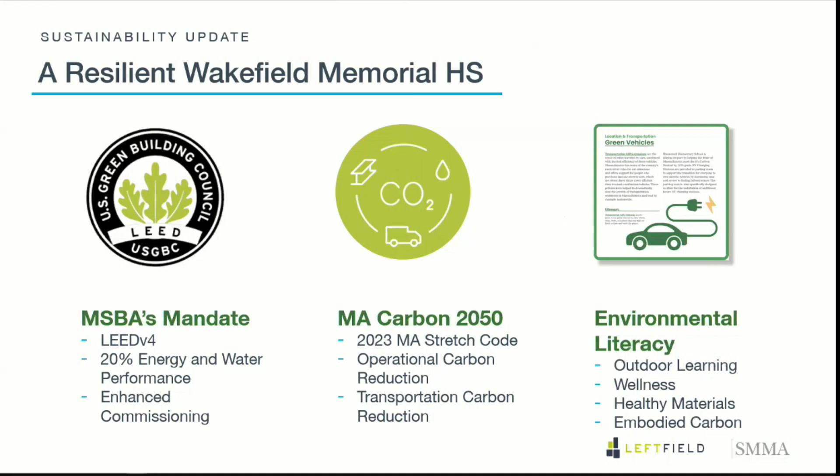And this is one of the most important items, criteria, and features that we want to make sure we don't forget about and fully integrate into the project design: environmental literacy, using the building and its features to support and complement an educational curriculum that embraces environmental leadership.

So to give you a bit of an overview, we have a new energy stretch code coming, as I mentioned, next year. It will be mandated next year as part of the state's commitment and requirement per the law to update their energy code every 3 years. The new code will be based upon IECC 2021, which has basically integrated a lot of our current Massachusetts stretch code as part of this new version of IECC.

The state is building upon that IECC 2021 with the new stretch code, which is currently under review. The language is under review and planned to be issued January 2023. The one different thing this time with the update to the code is that there will be an opt-in net zero energy code option for green communities. Cities and towns may automatically fold in the stretch code, called the standard stretch code, or they may opt into a net zero energy stretch code.

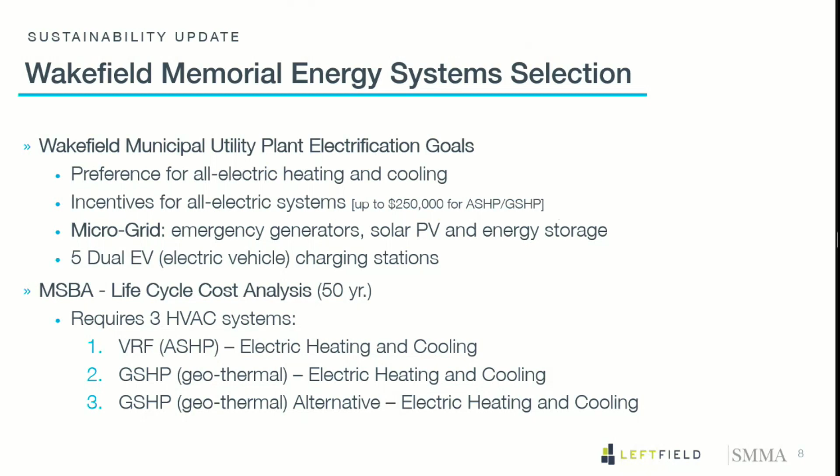The major differentiator between the three systems in the life cycle cost analysis is the fact that they require a comparison of three different HVAC systems. On the board here, you can see we have an air source heat pump system, a ground source heat pump system, and there are two variations of the ground source heat pump system as part of the analysis we're about to complete in the next few weeks to submit to MSBA.

The project, as mentioned, is going to be LEED certified. As part of the design of the project, we want everyone to understand that it's not just energy—it's a comprehensive application of the whole spectrum of sustainable design criteria. The project will include water efficiency and sustainable site features.

We're paying attention to indoor environmental quality, and of course sustainable materials, as well as making the building ready with systems and signage that will support and inform occupant behavior once the building is occupied.

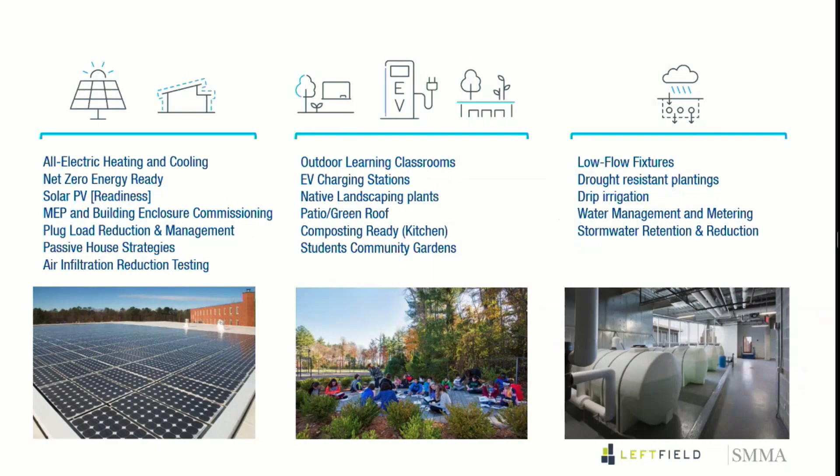During your Q&A, if you have any questions about these, the idea is to give you sort of the breadth of what these involve, but we can certainly come back to these slides.

In terms of materials, we have all the basics of sustainable materials: recycled content, certified wood, environmental product declaration, which looks at the global impact of products in terms of pollution, and the health product declaration. We're also looking at materials that are warm, biophilia, thermal comfort, abundant daylight. All of these are part of indoor environmental quality, low emitting material, and fenestration in the right place so you bring enough daylight without losing too much on energy performance. And of course, user behavior and plug load management, and green education curriculum in terms of post-occupancy.

In terms of passive house strategies and net zero energy strategies, the first focus is on the enclosure—we need to make sure it's highly insulated and airtight. That airtightness is complemented by whole building air infiltration testing, which is part of the project. I'd like to note that testing is actually going to be required in the new code. Then all the high performance systems, in combination with the enclosure, are part of achieving net zero ready.

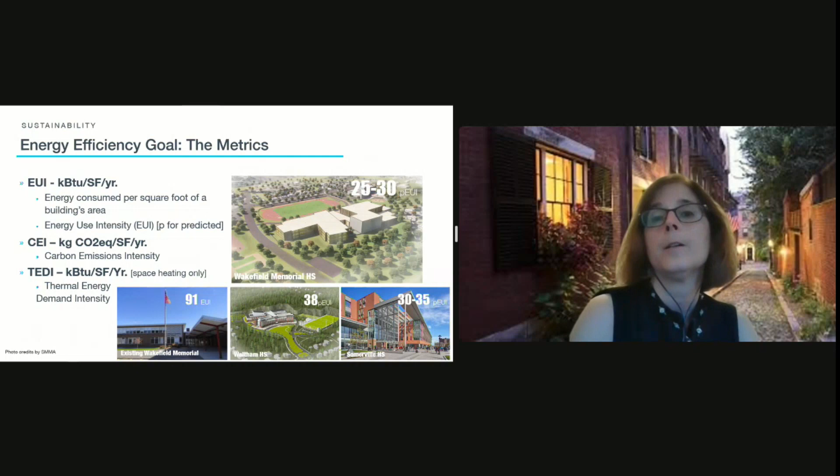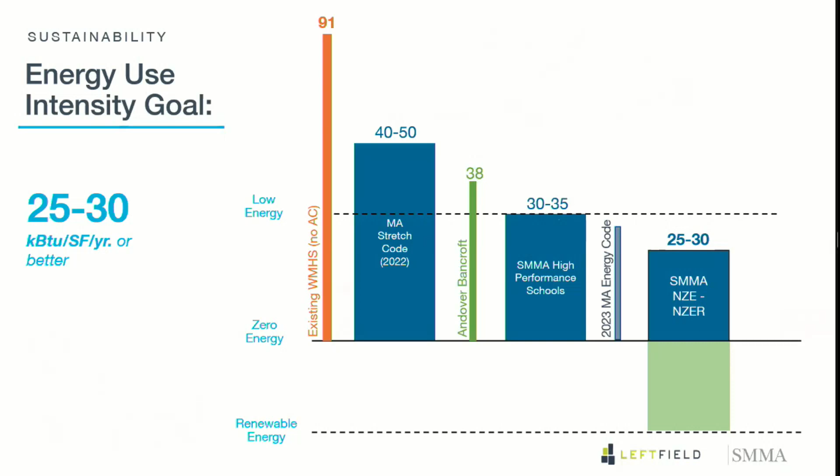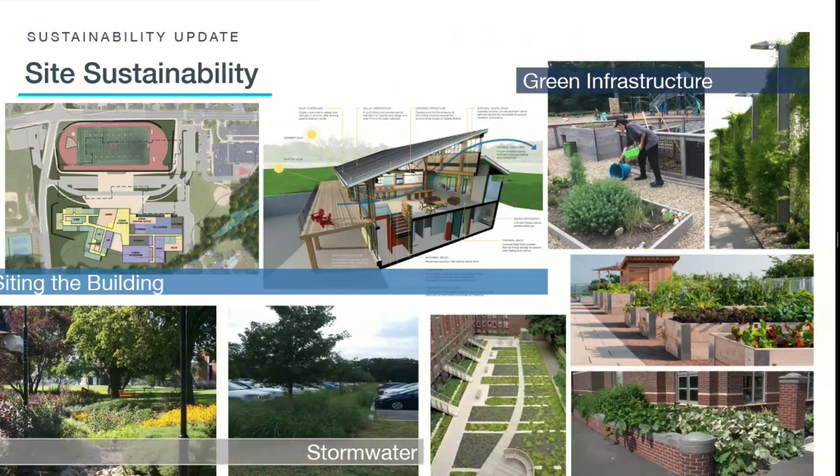A couple of images describe the potential of what could be done on the site in terms of native planting, outdoor learning, and student gardens. I want to leave that slide there and start the question period. I put that slide there because it's much nicer than the payback analysis table.

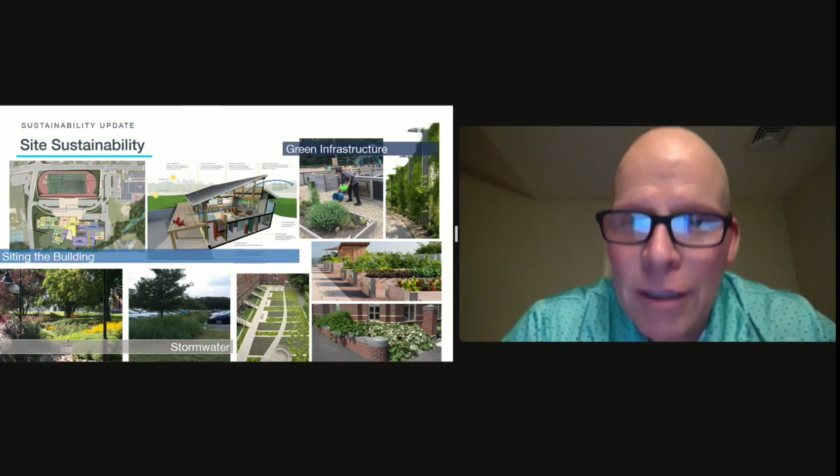Thank you. I think Mr. Lyons had his hand up. I just wanted to let you know, Martine, that Marcy had her hand up. Oh, okay, thank you, Andy Bray.

Yes, just a comment and a question on the compost readiness. Given the likelihood that at some point in the not too distant future the state's going to require composting of large facilities like the district's kitchens, as they've been moving in that direction, as have other states, what would it look like to make this project compost ready, and what would be the associated costs?

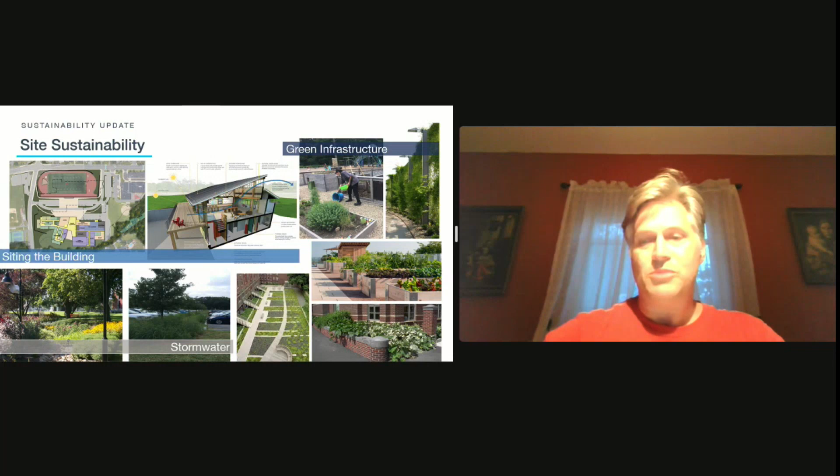I do not have an answer for costs right now off the top of my head, but we've done it in other schools. It's a choice; I don't think it's a matter of cost. It's more a matter of organizing the kitchen so that it's ready, with a space for where to put the compost matter. And then it depends if it's being picked up - we have schools where it's put in a bin and picked up, versus being outside. So it's a coordination that needs to happen between the district and the kitchen consultant to make it ready.

Okay, Andy? Christine? Hi, playing with all the buttons. Can you hear me? Yes.

Excellent. You showed an example of a LEED scorecard that had 58 points tracking for LEED Silver. Is that the scorecard you're using for this site, or is that just an example scorecard?

This is the school scorecard. That is not the final schematic design, but it's very close to final. I just want to warn a little bit on the 58, because we're well in the 50s, which is really good. Our goal is 50, and we usually submit more than 50 because during the review with GBCI and USGBC, usually things happen and we lose points along the way. So we submit more than what we need. 58 is a good cushion, but we may not end up at 58.

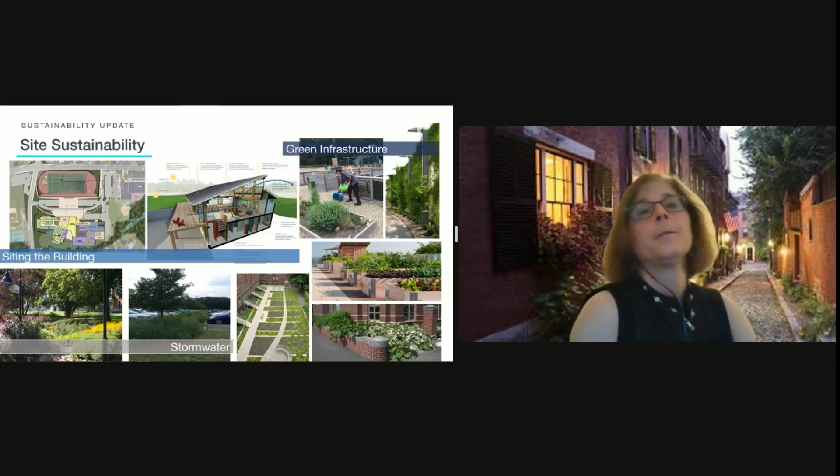You had a number that you were tracking as well, so are you fairly confident that we'll hit the silver status? Or, I mean, you're close to the gold border, but that's a bit ambitious. Right, we can't say we will get gold, but we're confident for silver. Yes, excellent, thank you very much. You're welcome.

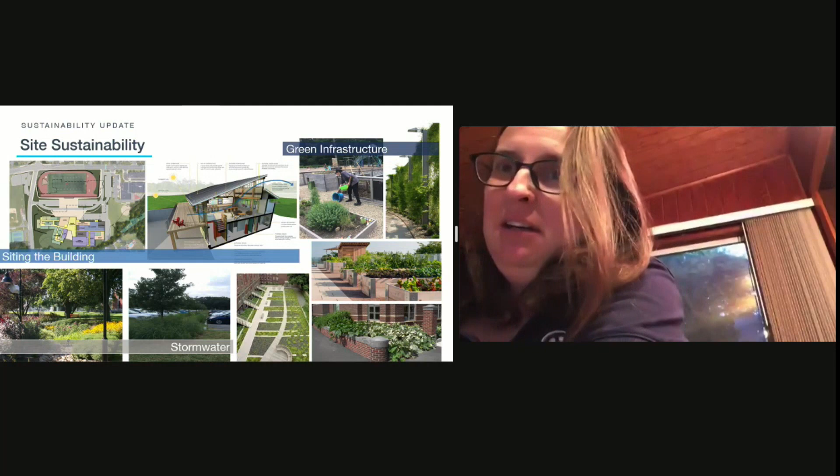Are there other questions regarding sustainability? Joe, we have a question in the chat. Oh, okay. And it is, what is the time frame for completion?

We're looking to complete the schematic design phase and submit to MSBA on October 27th, and we're looking for an MSBA Board of Directors vote on December 21st. And we're looking for a town vote in January of 2023, which will put us on track for design, development, and construction documents over the next 14 months or so, and then construction will follow after that. We're hoping to open the school by 2027, with the demolition and field replaced. The school will actually open earlier, in 2026, with final completion in 2027.

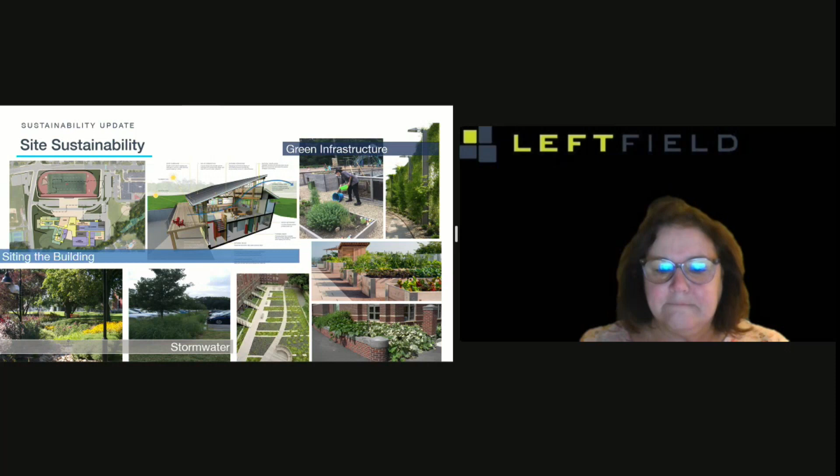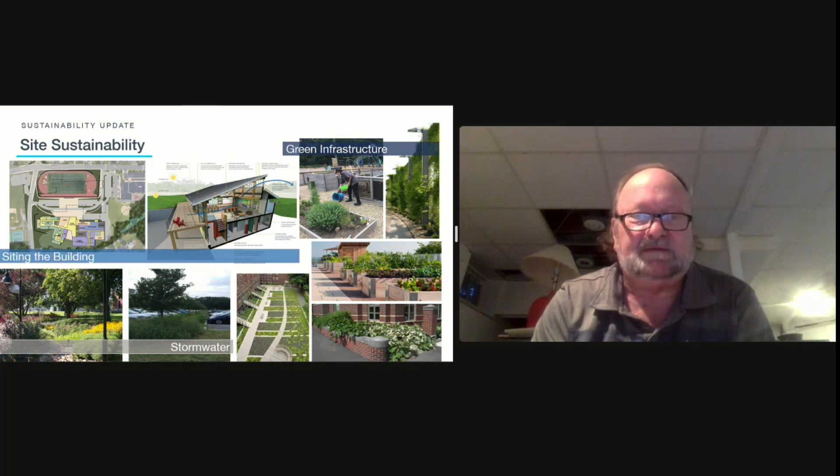Are there any other questions? Seeing none, we will go over to the design update. Brian, I assume.

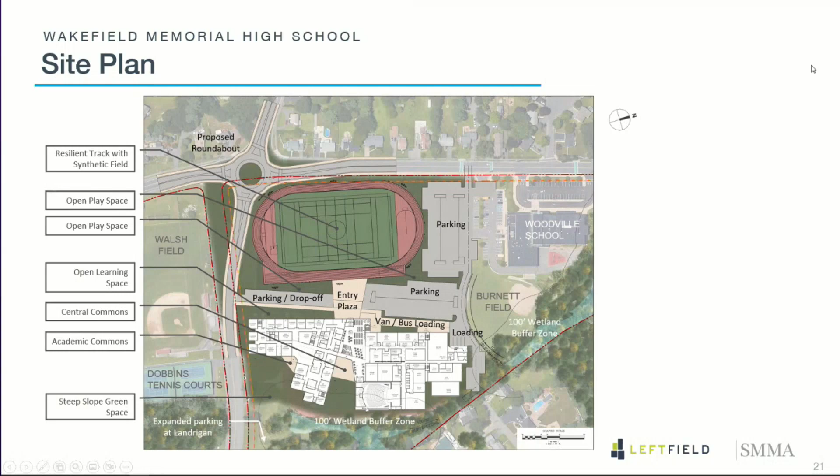Thanks, Brian. It's really exciting to be here tonight to update you all on the progress of the project, but more specifically for me, the site design. We've been busy meeting with stakeholders such as the district, members of the community, facilities, police, fire, the building committee.

If you skip to the next slide, Brian, the current plan is starting to feel like an actual design. We've begun to see design of the student and pedestrian spaces. Those will include outdoor classrooms, places to eat, places to play, and gather and congregate.

Just to take a step back, we're all very aware of the limitations of the existing site - slopes, wetlands, various fields, a high school facility, Woodville right next door. But in the feasibility study, we concluded that the best project was a new building on the existing track, and then after demolition of the existing building, a new track facility would be built. We make it sound so easy.

The student and pedestrian spaces we are planning more specifically, and you can follow along on the plan that's shown. So if you start at the top, a new resilient track with a synthetic field. We're planning for open spaces. These include planning for play for all ages - students, community, spectators, families that come in to the site for the school and field events. We're taking advantage of moments of open space and using them for learning environments as well.

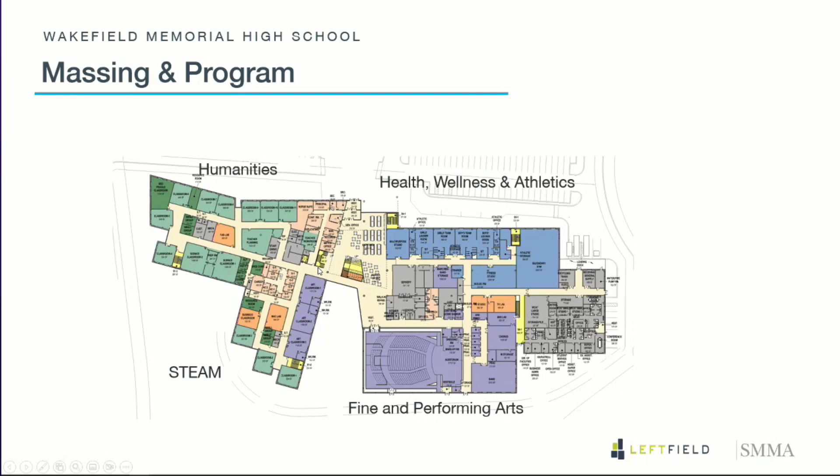So here we have a more current plan. This is, as of today, what our plan is shaping up to look like. You can see the major components represented still from that diagram. There are a few areas we've continued to work through. We've had a really productive summer working with administration, staff, and leadership. Even in the summertime when things are quiet, there have been a lot of meetings, and we've been working through the plan and really developing things. But this slide isn't yet going into all that detail. It's really to show you where we are in terms of a three-dimensional approach to the project.

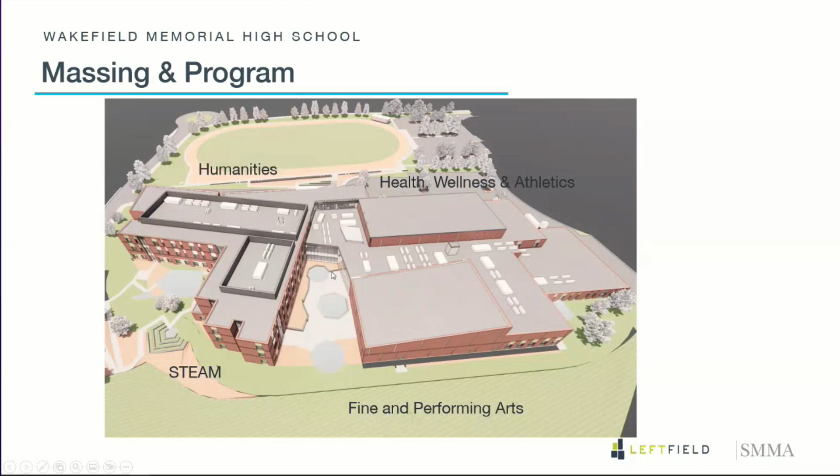And obviously seeing this prompts a reaction. This is looking at the back of the school. It's oriented to overlay with what you're used to seeing in the plan orientation. You can see the elements: humanities and STEAM on the left, with outdoor classrooms and outdoor learning space, and breakout space between those wings of the building. On the right-hand side, health, wellness, and athletics, anchored by the gym, and fine and performing arts, anchored by the auditorium, are the major pieces on the north side. So north is on the right in this image.

So as we go into the plan in a bit more detail, again, north is to the right-hand side, so most of the sun exposure is on the left-hand side. Earlier on, if you recall, we placed the academic wings of the building oriented toward the south to take advantage of as much natural light as we could get.

And within those clusters, there's an L-shaped geometric configuration, if you will. Because of the constraints of the site, which Erin was alluding to, we don't have a long building that can sprawl out. We have a very compact building, even though the length in its entirety is over 600 feet long. The building has a series of circulation elements, the corridors, that loop back on themselves, and they place interdisciplinary work at their center.

So each of the orange spaces that anchor a cluster represents a technology or career vocational space. It's really hands-on learning that serves as a resource for the rooms around it. For example, on the bottom here, the art classrooms, which are able to open a big overhead door out to the outdoor space for large projects, have at the center of their anchor the Mac Lab. So digital artwork can be done at the same time the 2D and 3D work is happening immediately adjacent. There are other classrooms around that create other adjacencies that fold in with those programs. So we've really started to hone some of these relationships.

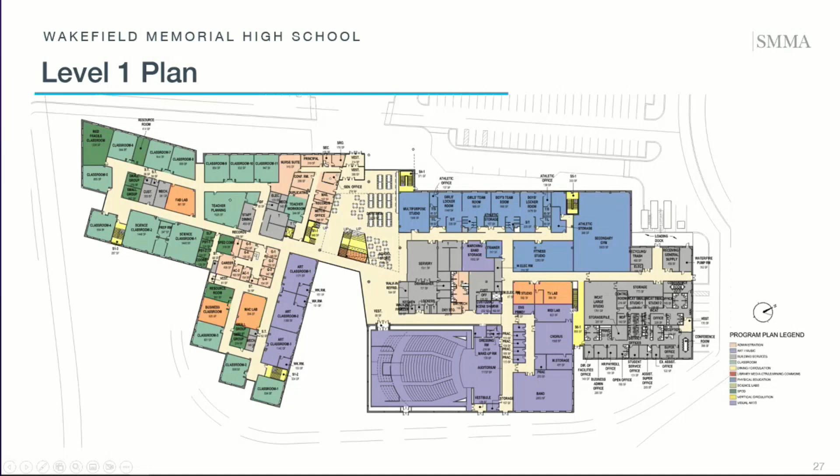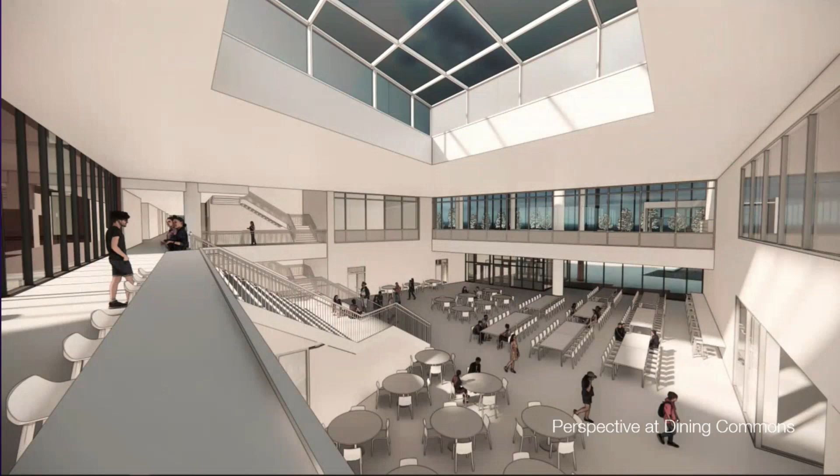As we go up the stair and look back, we're looking at the main entry down below, and the media center wrapping over the front entry, really animating the front of the school. Looking to the left, there's a corridor that leads down through the academic wing and goes all the way to the outside—that's a new development we've created.

Here on plan level 2, you can see the spine element that stretches from the top of that stair at the dining commons in a straight line all the way through, creating ease of wayfinding and an interior Main Street, if you will. Corridors in these plans are generally 10 feet wide, which is slightly more generous than the current school.

You can see the wrapping of classrooms on the perimeter. We've clustered science classrooms to the lower left, looking out to that outdoor academic space. The science classrooms on the bottom wing, classrooms 2 and 6 in the plan, have access to a terrace—left of the LGI there's a doorway out, which could potentially be an outdoor classroom on a terrace raised up one level.

To the right-hand side is the gym, the health classrooms, and there's also special education, OT, PT space, and an adaptive PE space associated with the gym.

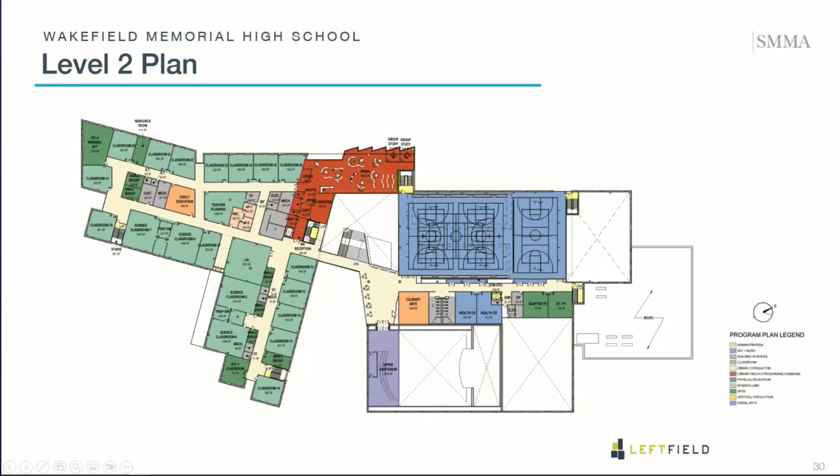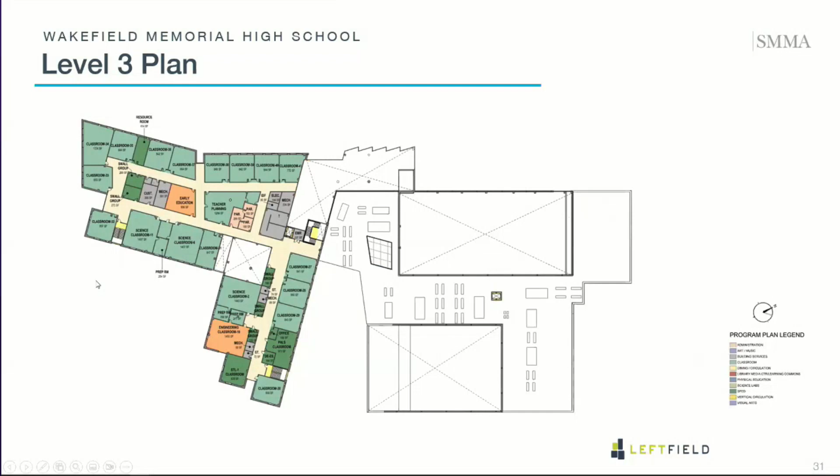As we go up to level 3, we can see we do have the special education pieces in dark green on every level, so really distributed throughout the school to be able to integrate those programs in with the overall educational mission of the school.

Moving to the exterior, we're really excited to be going into the third dimension and looking at the outside of the building. This is a very plan-heavy part of the design in this phase of schematic design, and we really need to lock in the plan with great adjacencies and make sure all spaces are accounted for. But we're excited to be looking at the exterior as well.

We talked about potential exterior enclosure materials, which will look like largely brick masonry, because this is really the most cost-effective and durable material out there, and is a little less impacted by the worldwide inflation and supply chain issues affecting the construction industry.

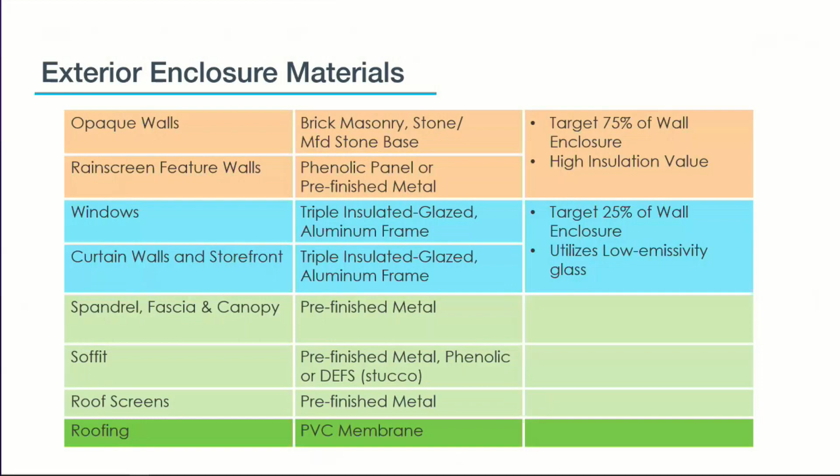There are other potential trim elements of metal—soffit elements and roof screens are pieces we're considering also. We'll have a light-colored PVC roof to help mitigate the heat island effect with a reflective roof. We want to acknowledge the architectural history of Wakefield, which we can do materially by using either red brick, a reference to a light-colored stone, or a mix of the two.

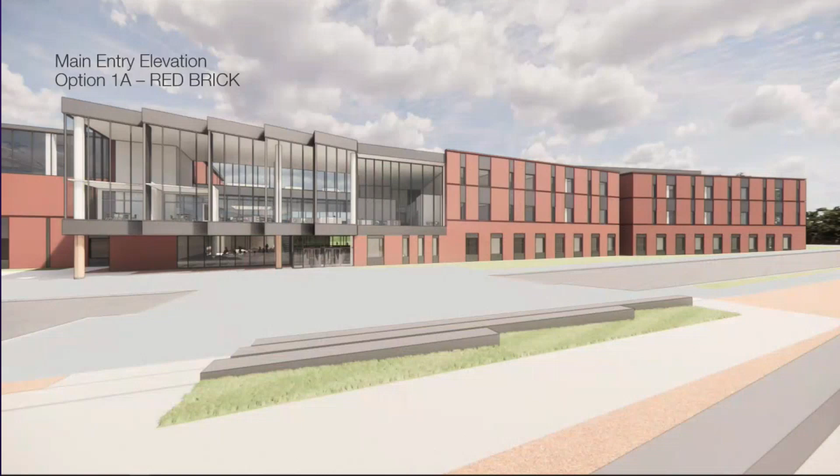We've had good feedback from many about the preference either for red brick, or when I say red, there's a range of red to brown to orange maybe. That family of brick is quite common in schools, and sometimes it's something people are expecting. But there's been a willingness with Wakefield to consider something that is a little bit of a departure.

We've presented some design studies of elevations of the building. We're looking at some patterns that are both playful but orderly, especially where they meet the ground, with a sort of set rhythm that we're looking at. So the rendering is representative of mainly brick with metal accents, and potentially a granite base for very high durability where the building meets the ground.

We did look at, and are looking at, the potential of a bit of a departure with a stone look, which could be achieved by either a light colored brick or materials that are laid up like brick but have a different composition and look like stone, with different textures and slight variations of color and modeling available there.

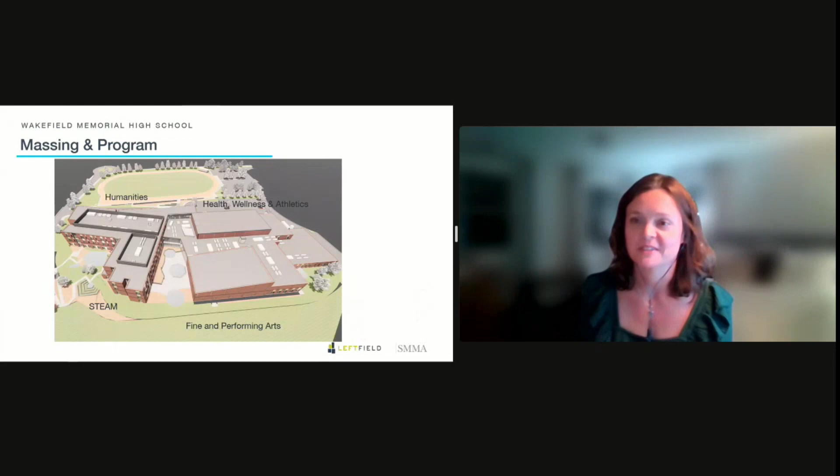Yeah, I think more for me, shade is important, but also it would be like sort of weatherproofing if that's possible, just so it could still be used during the rainy days too. I see, so you want the sides and the top? Yeah, I mean, I think it's pretty well protected from the sides. I was picturing almost like a retractable awning off the side of the building that you could pull out if needed. I don't know if that would work with this design or not, but just something to think about, because it did really help us use our space at Walton when we had the tent.

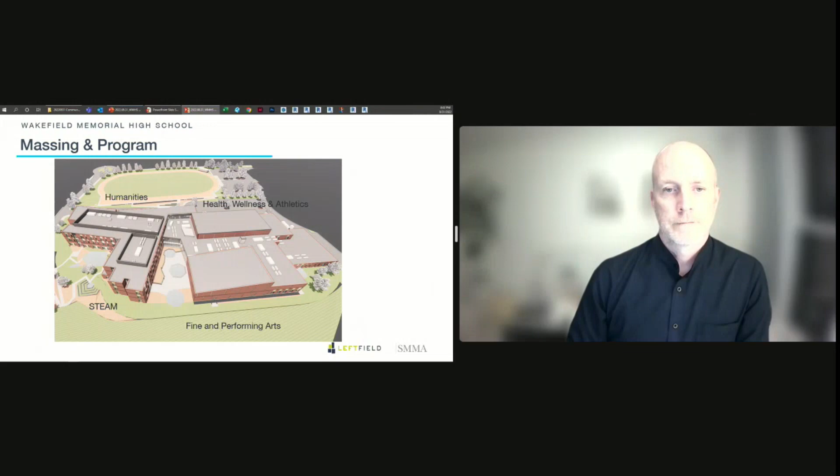And then unrelated, I was thinking about the parking. Will the new parking spaces allow for us to not have students parking on Farm Street anymore?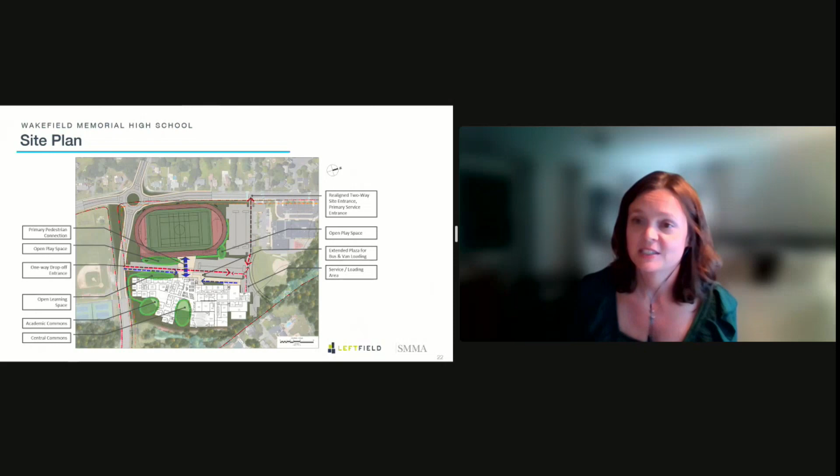So as we all know, the site is very limited. We are trying to make the proposed parking as efficient as possible. We've found some efficiencies with providing some on-site parking. What this diagram doesn't show is some planned expansion of parking at Landrigan Field. That will also serve during construction if it's completed in the initial phases. It will serve, and it will serve for the community off hours. So I really think that's something worthwhile to include in the project.

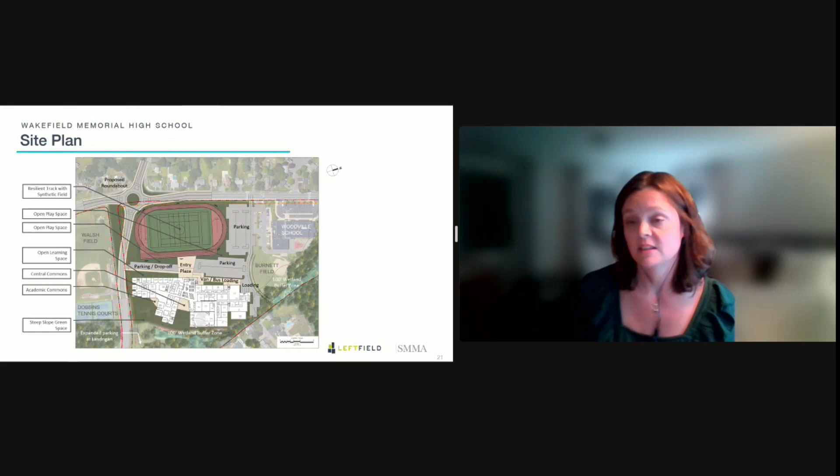Student parking is really an administrative issue. How parking works, we do intend to number all of the parking spaces in hopes that the district might adopt some sort of permit program.

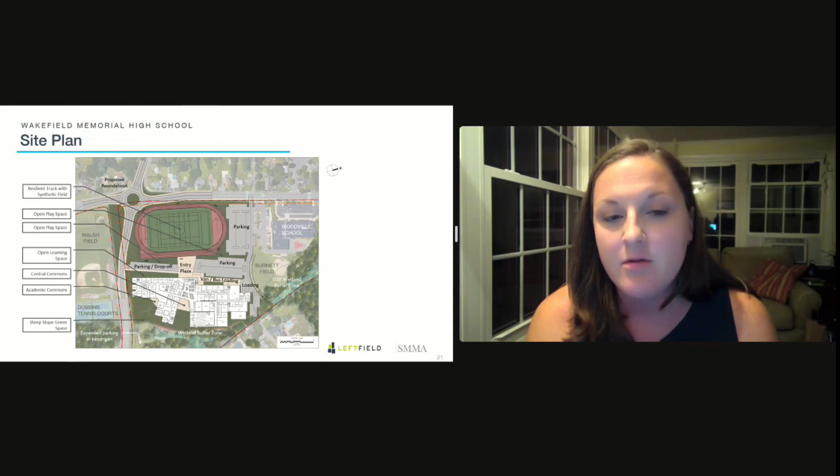This is kind of a Debbie Downer topic, but I was thinking about safety and security with recent school shooting issues. With all the glass around the building, are there measures you take, things you think about in terms of safety from that aspect?

Absolutely, of course. We've been meeting with a group of stakeholders. We've met with first responders. We have a security consultant on the project, and we've been talking through what those concerns are and how on other projects we've mitigated threats so that protocols can go into place.

It's a multi-layered approach, and we don't want to go into detail on the call, but we are addressing those concerns. Some of that may materialize as more opacity of the building, but there's also an aspect of being able to see and monitor what's going on that leads to better safety and a better reaction. So those are all part of the equation. It's the most serious issue we can tackle, and we take it really seriously, and we're going to continue to do that on the project.

Thank you. Sure. All right, is there any other questions or comments?

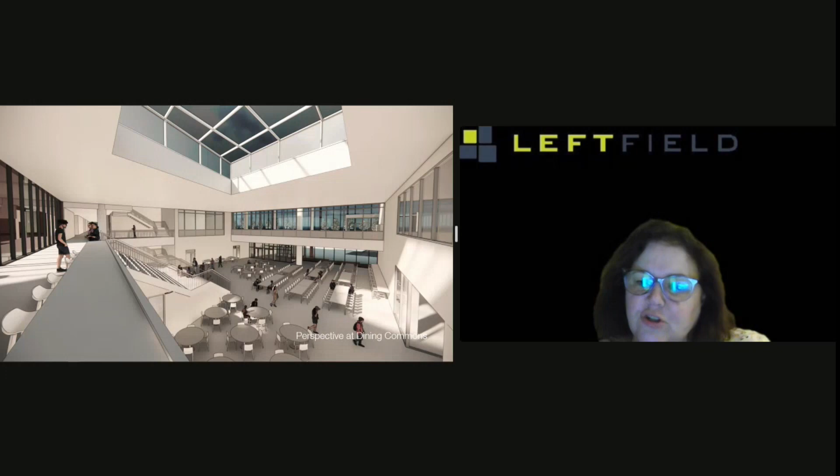Yes, we have one. Will the track and field be lighted? Where are bleachers planned? How much will they block the view of the school?

We are going to be lighting the track and field. It is currently lit, so we will be providing lighting as it is today. We are expanding the seating program, so right now we're planning to seat about 350 spectators. It will hardly block the school.

They're not bleachers per se, but more like landscape elements, kind of blocks built into the landscape. It's going to run along the straight part of the track. It's not going to obstruct the view of the school. We're thinking very much about those views, and it's important to see the building.

I think a nice effect of positioning the field at a mid-level between Farm Street and the entry to the school is that it creates a gentle grassy bowl between the field and the sidewalk. There's going to be a fence between the track and the grass, but I think it actually creates something of a slender linear park that could be nice to sit on.

Luna, is there anything else? Yes, a comment from Andy Bray: it's great to see how the adjacencies within and across the disciplines are coming together through the schematic design.